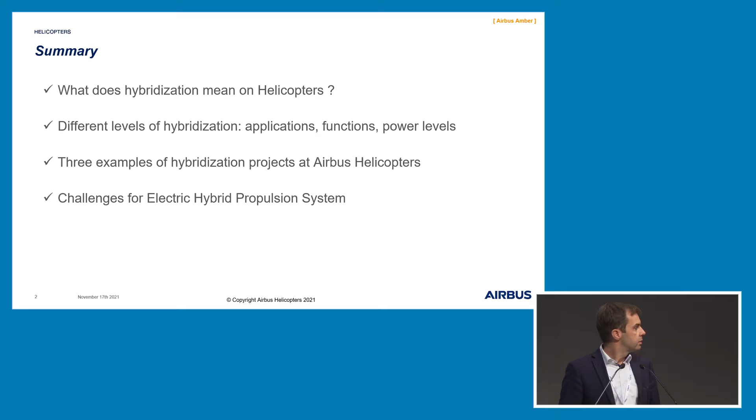And finally, we will have a look with Mark again on the main challenges that we see in terms of hybrid propulsion systems on helicopters and their certification. So I suggest that we start. I'll give you the floor.

So to start, maybe we can come back to some basics. So this is the architecture of the power system, not electrical system, but power system for helicopters. So you know it, you have thermal engines, one or several thermal engines, providing power supplied by energy, fuel. This power provided by the engine is transmitted to the gearbox, and this mechanical power is transferred to the rotors, main rotors, tail rotors of the helicopter for the lift and the sustentation of the aircraft.

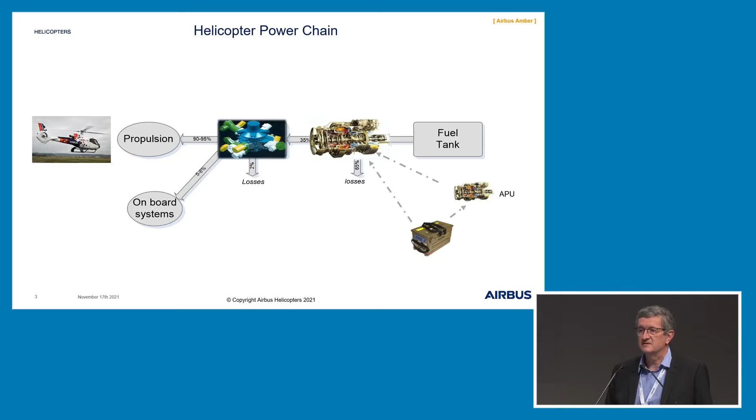So the engine can be started autonomously by batteries, or you may have also APUs for other onboard systems, for propulsion or non-propulsive systems, and the engine and the main gearbox can also provide power to onboard systems, non-propulsive, like the electrical system, hydraulic system, or ECS system. So we will focus in the next slides on the propulsion systems, not on the non-propulsive systems.

So when we are talking about hybridization of the propulsion system, what does that mean? What can we do with an electrical system to support the helicopter for some purpose? You will see in the next slides some applications and some functions. But in terms of architecture, what is the signification of hybridization? Hybridization means we will add another type of energy to support the thermal system in providing the lift and the thrust of the helicopter. And we can do it in several ways, in fact. Some examples, maybe not exhaustive, of the way we can help the propulsion.

The first one is what we call the micro-hybrid system. With a micro-hybrid system, the aim is not to provide power directly to the propulsion, but to help the thermal engine in some phases, and we will see in the following examples what we can do with that to support the thermal engine. Another possible architecture is what we call the serial hybrid.

Serial hybrid means that you have a thermal engine. The thermal engine can drive a generator. The generator can supply one or several electrical motors, and these motors can provide the mechanical power to the rotors, main rotors, tail rotors, directly or through gears or through a gearbox. And another possible application is to have a direct drive of the tail rotor by an electrical machine, for example.

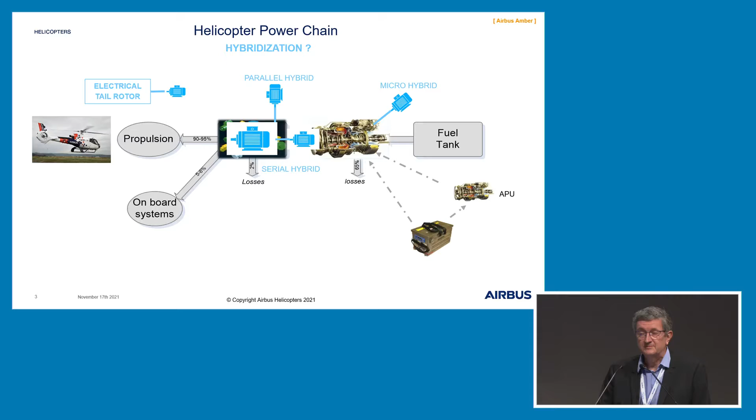So another way to describe architecture and hybridization is through the level of power and the proportion of the electrical system compared to the thermal system, as in these schematics. In fact, we use the same wording and architecture that is used in the automotive industry. This is the reason why we draw a lot of parallels between aeronautics and the automotive industry. But we have a main difference compared to automotive.

We do not have the possibility to recover energy as it is done in a car, for example, when you are in a braking situation. For a helicopter or for an aircraft, it's not possible. So if you stop the energy, stop the power, you stop the lift.

So it's not possible. So coming back to the figures, you can see in the vertical axis some power levels, to give you some order of magnitude. For sure, it depends on the platform, the weight of the helicopter, the architecture and the mission profile you want to implement. But that gives some order of magnitude of what level of power we need to implement for such a system, to have effective solutions to help the helicopter.

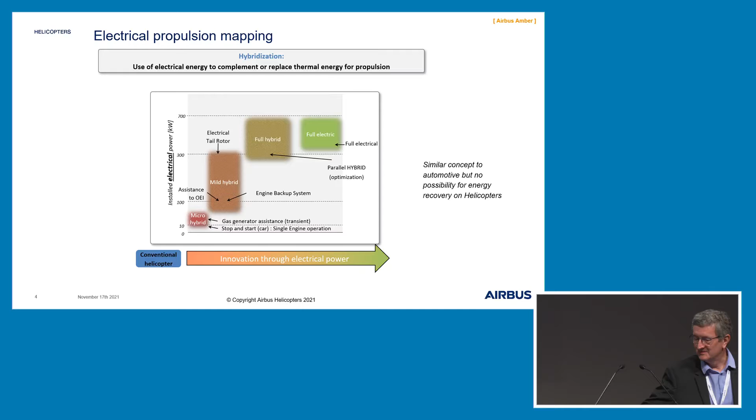We can see the same kind of picture in the next slide that we have prepared. So here you have mainly the different applications that we will address in detail just after this slide. The first column in green is the micro hybrid, the orange one is the mild hybrid, and the full hybrid is the violet one. And we leave outside the scope today the eVTOL full electric stuff, which is a specific topic in itself. So the idea is to show you what we are looking for in terms of value with our hybridization approach.

So for the first column, when you have micro-hybridization, what we are looking for are mainly consumption and range. So performance in terms of range for the customer, they can go farther with a more economic power plant, thanks to the fact that we can, and we'll see it later, switch off one of the twin engines.

On what we call the engine backup system, the mild hybrid application that we are testing this year, and we will show it just a bit later, what we are looking for is safety first, facilitating the autorotation for the pilot in case of engine failure. But we are also looking at performance. Performance meaning takeoff weight increase. So we are testing the possibility to increase the takeoff weight of a single engine platform thanks to the presence of the hybrid propulsion system.

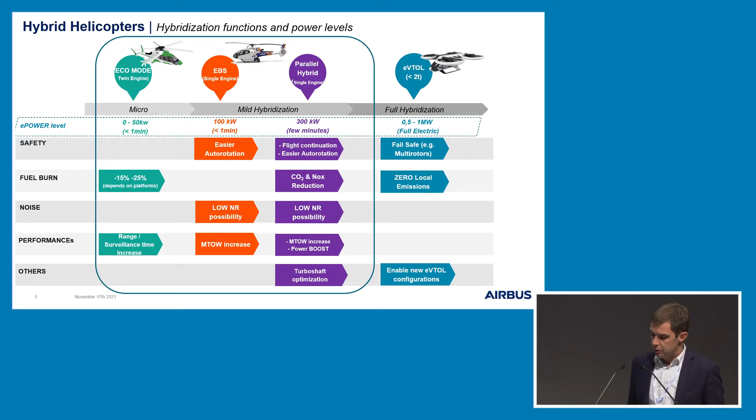Okay, so micro-hybrid application, as explained before, is not really a hybridization of the propulsion system. Micro-hybrid is to support the engine in some phases. So why we need to support the engine, and this is one application where we need a big support for the electrical system, is for what we call eco mode, economic mode. Economic mode for a twin-engine helicopter. The aim is to save some fuel, to reduce the emission by using only one engine in the cruise mode,

to use this engine with its best efficiency, instead of splitting the power between the two engines with an efficiency lower than one engine alone. So the gain is to save emission, to save fuel, to increase the range. And for that, we need to stop one engine. In fact, we don't really stop one engine. We put one engine in what we call sleeping mode.

That means the engine continues to run, but is not autonomous. We help the engine to be at a minimum speed, to be able also to restart this engine very quickly, because if you have a failure of the running engine, you have no more power and you can't continue the flight. You are in auto-rotation mode. So we need to restart this engine very quickly, in a few seconds, to avoid the altitude drop during this phase.

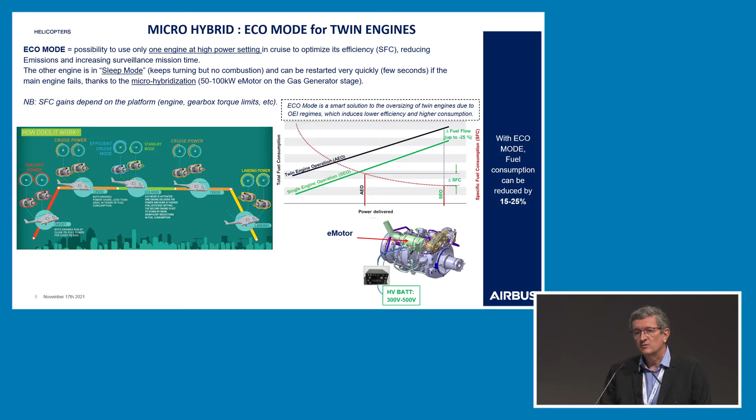And to do that, the power of the electrical starting circuits has to be multiplied by 2, 3, 4. This is the reason why we have such amount of power, 50, 100 kilowatts, for such application, with demonstrations ongoing where we can very quickly start the engine.

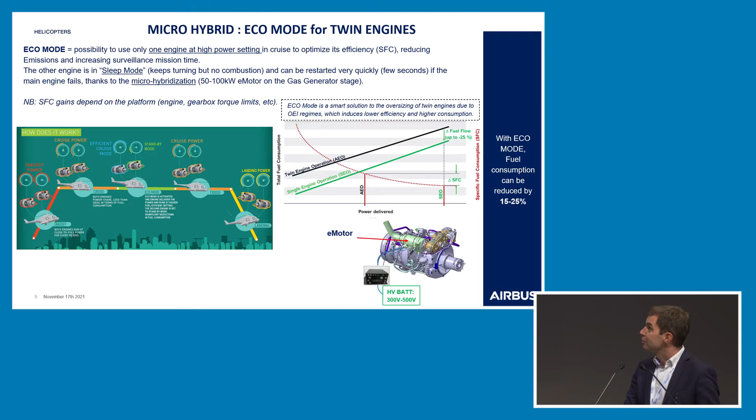Next one. Yes. So if we switch to the mild hybrid application, what we call engine backup system, you can see here in this slide what we are looking for. I said before, we have around 100 kilowatts available for 20, 30 seconds. And what we look for is safety, first of all, as it's written on the left, because we make the auto-rotation operation easier for the pilot. We know that today it is a maneuver which remains critical for pilots. They train this, but this engine backup system can really help them to make it much more easily and smoothly if the failure occurs. So the first target is really safety.

Second target that we are focusing on is performance. As I said before, we realize that if we are able to provide this amount of power during a failure or takeoff, for instance, we can increase the maximum takeoff weight of the platform significantly. And this is the work we are doing today with some testing of the H130 platform that we will show later. And we are really working to bring this performance benefit together with the safety benefit, which is probably a really good value for customers using single engine helicopters.

Third benefit, as I said before, noise reduction, that we are addressing as well in parallel. As you can see on the screen, the idea is to increase this performance takeoff weight of the platform sufficiently high in order to compensate the weight of the system, which is important.

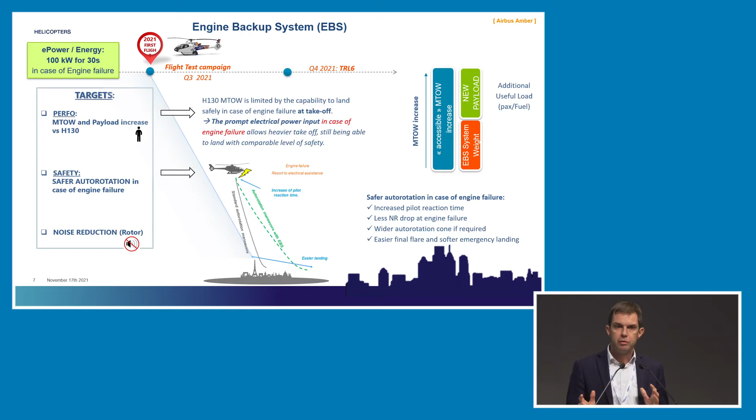But we want to increase the takeoff weight much more in order to give the customer the possibility to have extra payload or extra fuel for different missions, in the more important payload. So that's the key feature of this system: safety and performance together for the customers.

Just a quick look at the system, how it looks today. Just some simple sketches to give you an idea of what we are doing. We are installing, for instance, the batteries and the electrical components in the base, and on the top, on the main deck, we install an electrical motor on the gearbox. So something very simple and easy to install on this kind of simple H130 helicopter.

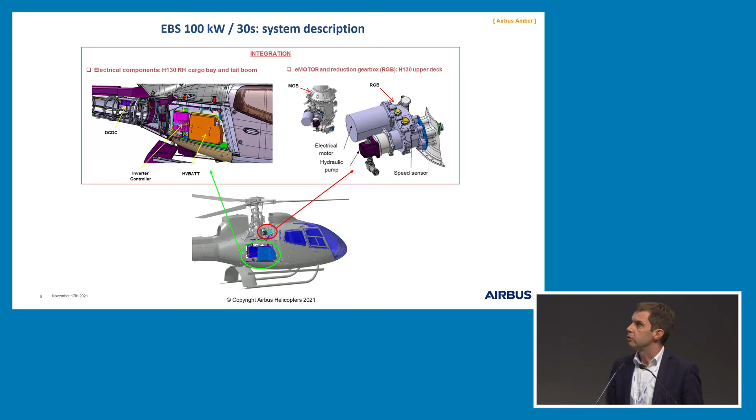The next slide is just a short video clip of the test we did last month. Here you will see just a simulation of the engine failure at roughly 10 feet from the ground, 7-10 feet, with and without the system, to give you an idea of the difference of having or not this 100 kilowatts in case of a simulation of engine failure close to the ground. Hopefully it will work. Let's try.

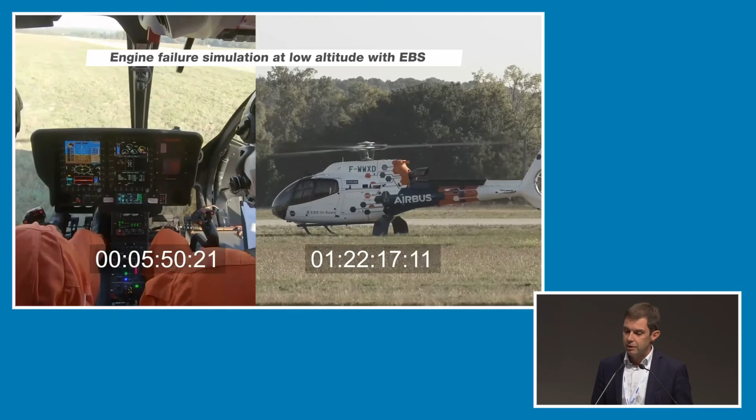So this is without the system. This is with the system. So you can probably hear the electrical motor, as we had the cam in the cockpit, so it was recorded quite well, which shows very well the rapidity, the speed of the system. It detects the failure basically instantaneously and provides power right off the bat, 100 kilowatts to the rotor, to limit this drop speed and limit the vertical acceleration at touchdown.

So it's something that we are testing this way. We are doing many other points of the flight envelope to see the advantages and the benefits, but just to give you an idea of what we can gain with such an amount of power, which is not huge, basically. 100 kilowatts is 1/5 of the power of the gearbox of the 130, so it's significant, but still manageable in terms of global mass of the system, which we will for sure address for future projects and certification later on.

Next slide, and I conclude here for my part: the parallel hybrid approach. So in parallel to the EBS that we just observed, so 100 kilowatts more or less in case of failure, we are also addressing the parallel hybrid approach. You can see a bit here on the slide. The idea in this case is to have sufficient power to continue the flight in case of engine failure. So the power will need to be higher, the energy will be higher, to allow, let's say, a couple of minutes of continued flight in case of engine failure.

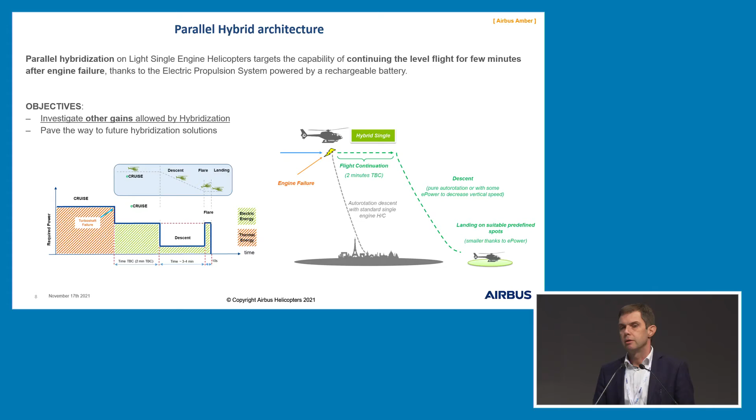So to finish this presentation, after I've presented the different application architectures, I think it's important also to come back to the challenges to implement such systems. On the left side, you can see a generic scheme that shows what can be installed when we are talking about hybridization, more from the technology bricks point of view. You have seen the architecture at the beginning. Here you are more at the technology bricks level, with the thermal engine, electrical motors, controllers, distribution, gearbox. So a lot of different bricks with different technologies we have to mix together.

This is a generic architecture, for sure, depending on the application. As you have seen before, it has to be adapted to the platform, to the power, to the voltage, for example, to the specific need. So the main challenge of this hybridization today is the performance, for sure, because we have high power, high energy components, electrical power and electrical energy components, in particular for energy. The energy density of a battery, for example, is very low compared to a fuel system. So the empty weight increase due to the hybridization is significant.

So we have to work on the weight, the energy density, the power density of the components from the performance point of view. But for sure it's not sufficient. We have to also consider that when we are talking about 100, 200, 300 kilowatts, the amount of power we are installing for the electrical system is much higher than we are currently doing in our current helicopters. On an Ecureuil, it's a 6 kilowatt electrical system. Here we are talking about several hundreds of kilowatts. So the electrical system brings new hazards, new risks, maybe not new, but additional consequences in terms of failures compared to what we have today in our helicopters.

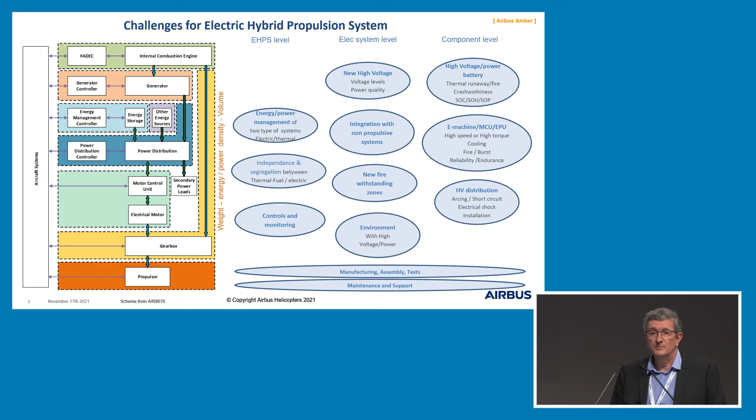And the two main topics are also linked to safety, not only the safety of the product itself or of the operation, but also the safety of the people who are not on board: the people who will have to manufacture, install, test and maintain the system. So these topics have to be considered in a good way to avoid issues, not only in flight but in preparation and maintenance. And we can maybe use experience and talk with our colleagues from automotive to take the feedback and experience from the hybrid cars that already exist in the field.